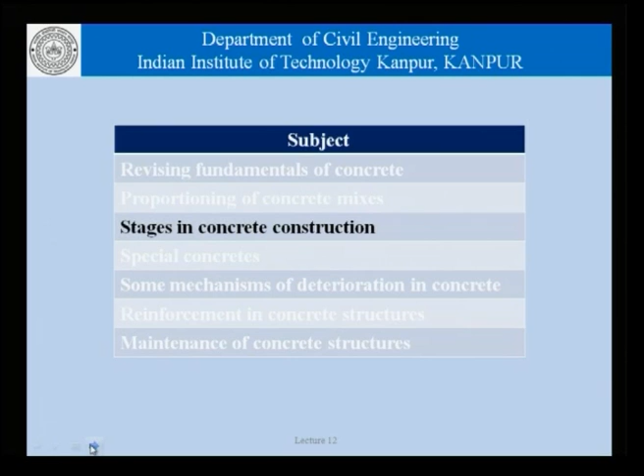So in the discussion today, we will look at the aspect relating to stages in concrete construction from the point of view of quality control and assurance.

We should remember that quality is closely related to accidents and safety. Poor quality construction invites accidents while construction is going on, or even later on. Therefore, it is important that everyone involved with concrete construction leaves no stone unturned in ensuring quality construction.

We will talk today about different aspects which are related to, and very important to, ensuring quality construction of concrete structures.

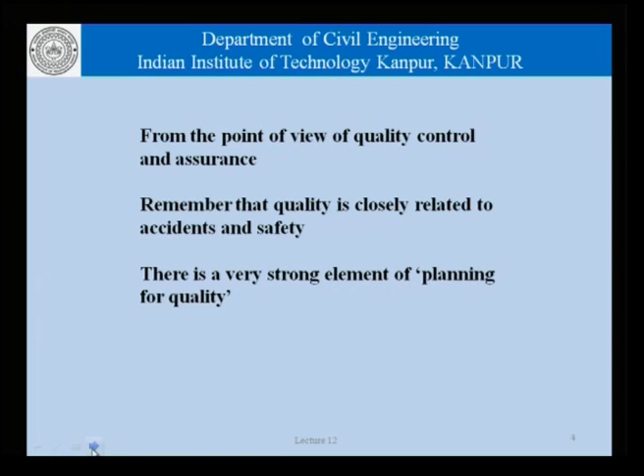There is a very strong element of planning for quality. Quality does not come on its own. Engineers and technical people engaged in various activities related to concrete construction, whether material selection, batching at a concrete plant, placing, or curing, everyone has a role to play in ensuring quality, and it can be planned. If we are systematic in our approach, no matter what we are doing, we would be contributing to quality. Conversely, any lacks, lacuna, or laxity at any stage leads to poor quality construction.

It has an implication on the quality, to the extent that no matter how hard the others try, the quality is impaired. So that is something we would try to take a look at today.

The fact that concrete is mostly placed in situ adds to the problem, making it more complex. Factory made products are easier to handle as far as quality control is concerned.

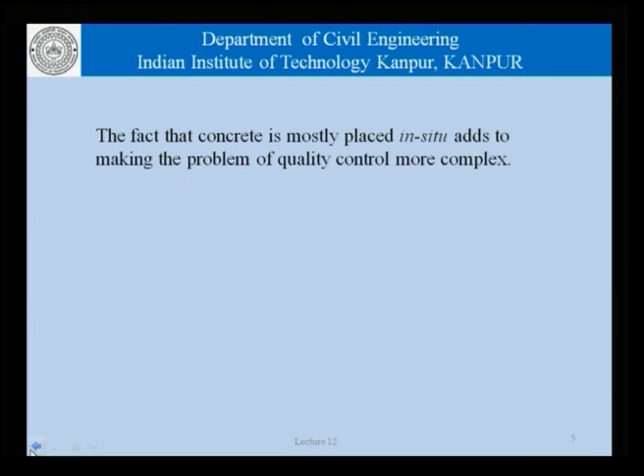There are different players involved in different processes as far as concrete construction is concerned, and the overall quality control cannot be allowed to drop in the no man's land. It is important that not only the people involved in the different individual aspects, material selection, proportioning, batching, transportation and so on, do their job, but finally the overall control of quality is also exercised and not lost sight of.

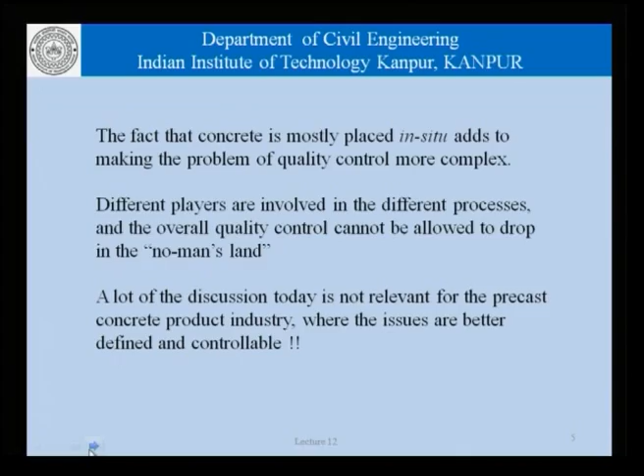A lot of this discussion today is not relevant perhaps for the precast industry, where concrete products are made in a controlled environment, in a factory, so the rules of normal mechanical engineering or a production line quality control are applicable. Today we are concerned primarily with concrete being placed in situ in a construction project at site.

Let us take an illustrative example. Consider the construction of a multi-story building. As is usual practice in such constructions, the shuttering for a higher level slab rests on the previous or lower slab. In a particular case, the slabs collapsed, and the accident was attributed to the fact that the previously cast slab did not have sufficient strength to carry the load that came upon it during construction of the upper slab.

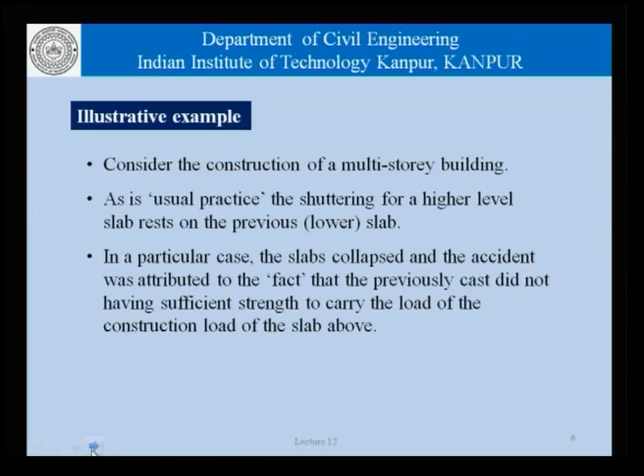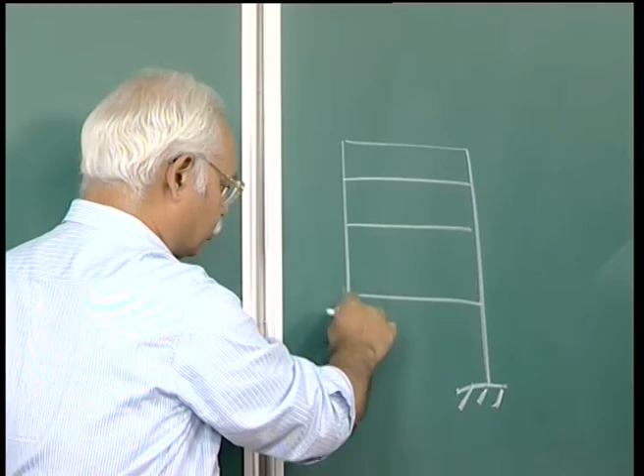What we are saying is the following: if this is a multi-story framed construction, we cast the structure up to this point, and to cast the slab here, we have the shuttering for this slab resting on the lower slab.

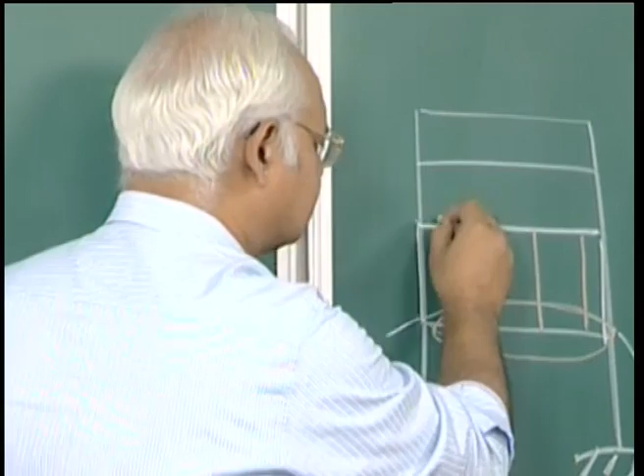While this slab is cast, the entire dead load of the concrete being cast, the live load of people moving around on it, the equipment kept there and so on, is transferred to this slab, which may not be very old. It is not difficult to believe or envisage a situation where, if this slab has not gained sufficient strength, the entire portion here will simply collapse.

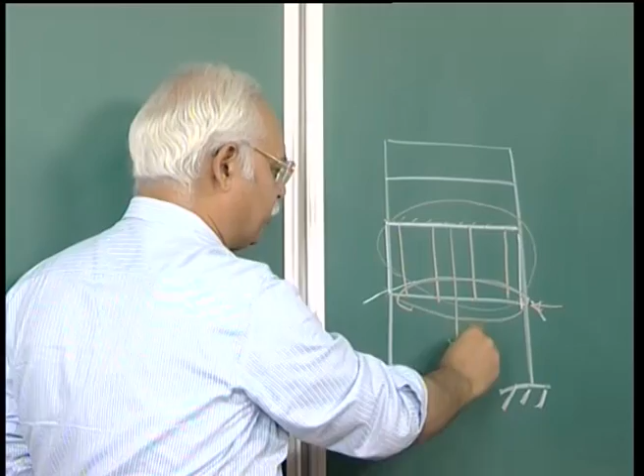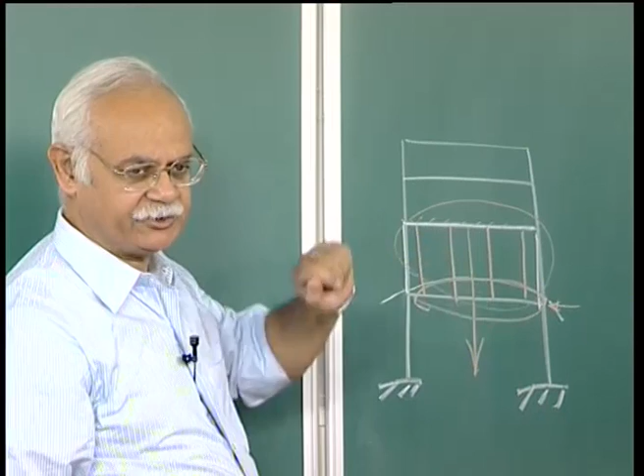If the dead load being applied, or the construction load being applied from the slab here, acts on this slab prematurely, what could be the possible causes for this situation? It could be the use of cements that had a slower initial gain in strength.

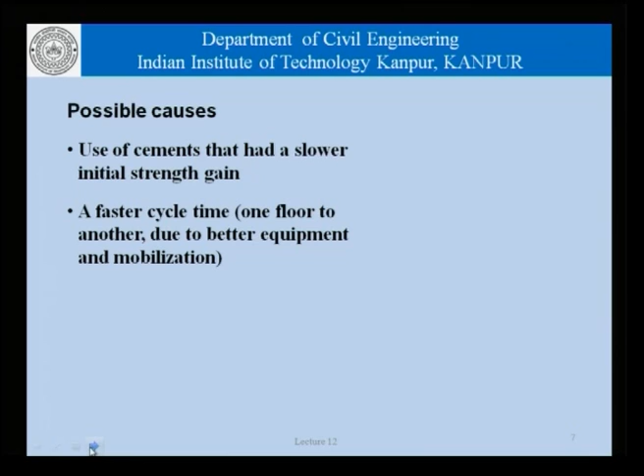It could be a faster cycle time, one floor to another, due to better equipment and mobilization, usually between one floor and the next. That is, the time it takes to do the columns, tie the scaffolding and shuttering for the next floor - that is what is called the cycle time, from one floor's slab to the next floor. Construction engineers try to maintain a certain schedule - say 3 days, 7 days, or 12 days - that is how that cycle will be, and how they plan their construction activity.

Now, on account of mechanization, better mobilization and so on, it is possible to cut the cycle time. But if we are not conscious of the fact that cement takes a certain amount of time to hydrate to the extent that a certain amount of strength develops, we are really playing with fire.

The importance of construction loads could have been ignored in the formal design process. When we design a concrete structure, these slabs for example, we design them for live loads, dead loads, wind loads, earthquake loads and so on. But in case the construction load happens to be substantial, then one has to formally include that in the design process itself.

There could be workmanship issues such as lack of curing leading to inadequate strength development at the bottom floor. Now, there could be so many factors, and some of them can be identified through traditional QC procedures. For others, it may not work.

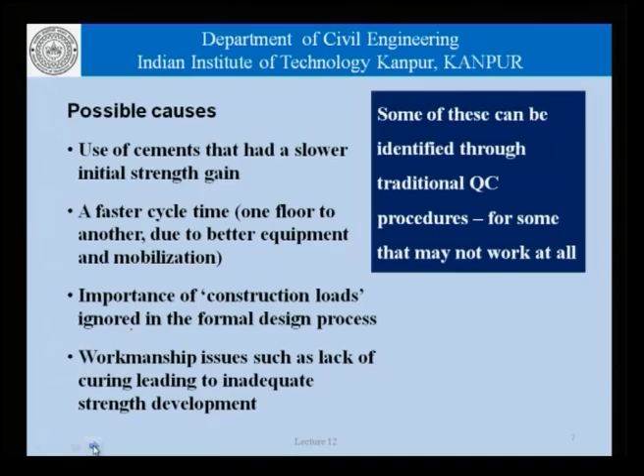Traditional QC procedure, as far as concrete construction is concerned, deals with strength gained in cubes. Now, the strength gained in cubes is determined while the cubes are cured in water at a certain temperature. The slabs need not be cured in those conditions. They may not have been adequately vibrated and so on and so forth.

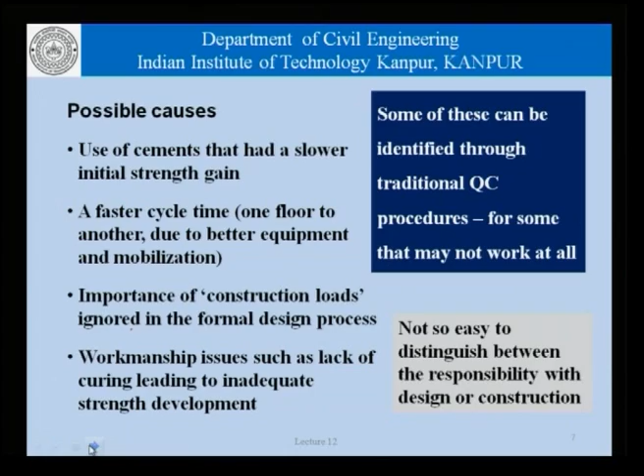The case or illustrative example that we discussed just now briefly also brings out the fact that it is not easy sometimes to distinguish between the responsibility of a designer and a contracting agency involved with the construction work. Indeed, finally, it is the construction work that has collapsed, but what was responsible for it could have been a design flaw, or lack of guidance to the contracting agency to carry out the work in terms of determining the kind of strength required for the slab before the slab above it could be cast, and so on.

Now, what is quality construction? Are there any absolute standards for quality? This subject has been debated greatly in literature dealing with products, industrial engineering, management issues and so on. From our point of view, quality would mean perhaps that the concrete construction should meet the specifications, which in turn means that there should be clear specifications and appropriate test methods for evaluation.

Also, consistency is another very important dimension of quality. Variability is an indicator of poor quality.

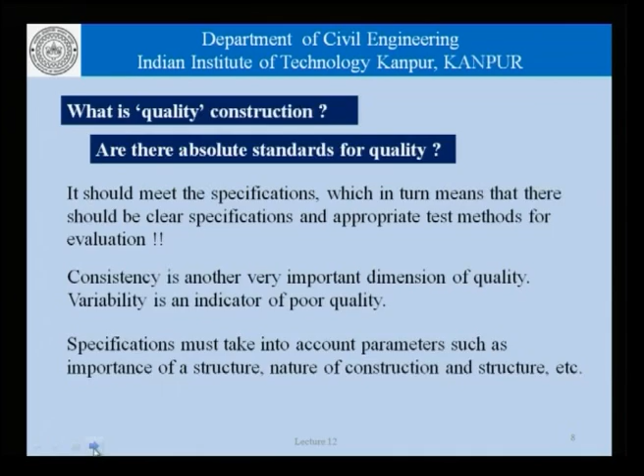Specifications that we write for quality must also take into account parameters such as the importance of a structure, nature of construction and structure, and so on. The specifications that we write need to address challenges on account of use of new materials, mechanization of construction, and changing professional environment.

Basically, quality means compliance with standards. If the standards are such that a medium performance is expected, that is all right, in which case the product should be of medium quality. If high performance is expected, then indeed the product should clear those higher standards. We must set the standards clearly and ensure that the construction meets that benchmark. Therefore, we must write the specifications very, very clearly, very, very unambiguously, so that it is easier to ensure compliance.

From that point of view, these 3 points we will elaborate a little more. We are using lots of new materials in construction - blast furnace slag, silica fume, fly ash, chemical admixtures which could be air entrainers, water reducers, set regulators and so on. We could be using short fibers in fiber reinforced concrete, and different kinds of reinforcing bars, epoxy coated bars, fiber reinforced plastics and so on. We could be using curing or sealing compounds.

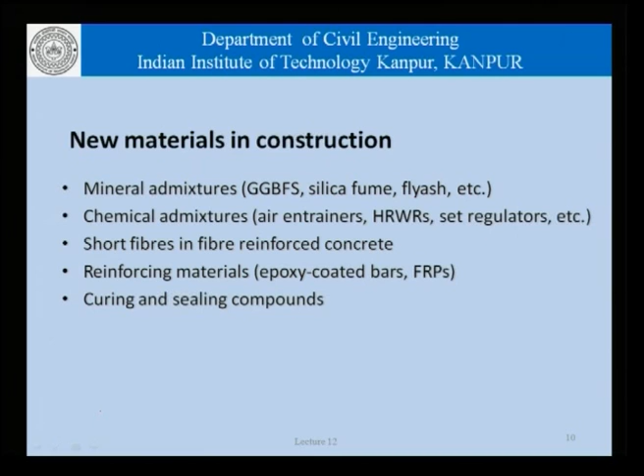So long as we ensure that the quality is not compromised, we can more or less use any material we want. For that, we need standards which will test these materials and test their compatibility with concrete. For example, certain fibers which are not durable in an alkaline environment would not be suitable for concrete construction, because concrete is a very alkaline medium. Therefore, designers and engineers must understand the concrete environment and properties, and then choose materials to enhance the properties of fresh or hardened concrete, durability, and so on.

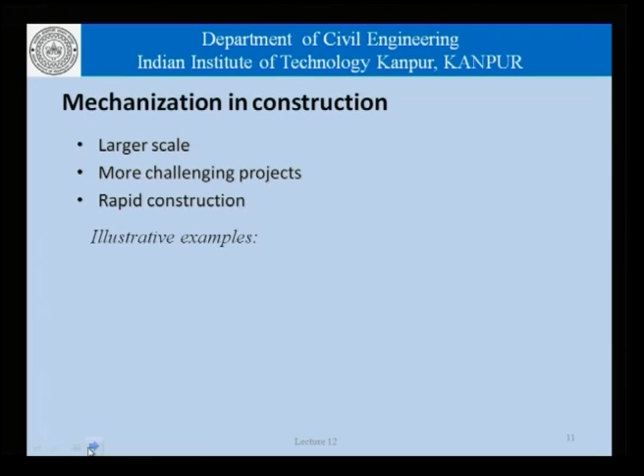As far as mechanization is concerned, that needs to be taken into account when writing specifications, because specifications valid for small scale, non-mechanized construction would not be sufficient when dealing with mechanical equipment. Concrete is being poured into more challenging environments, and very challenging projects are being executed with concrete, and that throws a challenge to clients and end users to write a specification.

One must remember also that in concrete construction, people from different companies work together. These engineers come from different companies with different objective functions. They are not there for charity, they are there for making a certain amount of profit for their company. Therefore, we cannot ensure quality at zero cost.

We can try for quality at low cost without allowing the cost to increase beyond a certain level. But at times an economic decision has to be made, where we say that if quality versus cost has a certain relationship, then for this cost, this is the best quality we can get, and therefore let us live with that. So the decision to accept a certain quality is often governed by economics, and that is something we must keep in mind.

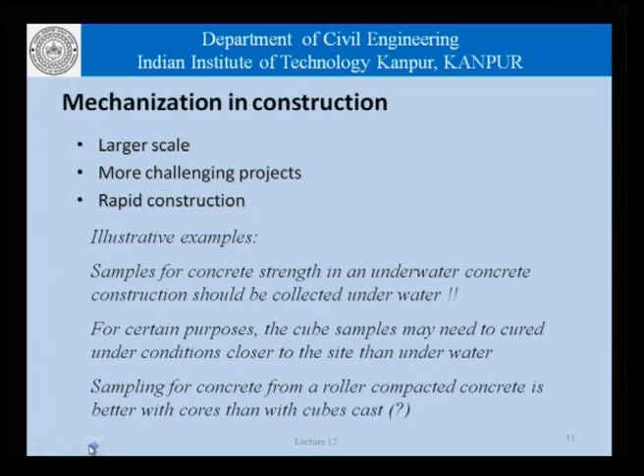Sampling concrete from roller compacted concrete is better with cores than with cubes. Roller compacted concrete is not vibrated using ordinary needle vibrators or internal vibrators. It makes no sense to cast the concrete in cubes using needle vibrators, when the concrete is being vibrated at site using vibratory rollers, except that we cannot create a cube using vibratory rollers. One may argue that we can create cubes using surface vibration. That perhaps is a better way of getting cubes more representative of the concrete cast in the roller compacted pavement or dam than a concrete cast in a cube using needle vibrators.

These things, though they may sound trivial, need to be written down in specifications or methods to be followed for quality control as a site specific document. We must remember that standards and specifications are generally guidelines. They should guide the engineer to write down and enforce specifications at a particular site. To deviate from that is nothing wrong, except that the deviation should be conscious and with full knowledge of the consequences.

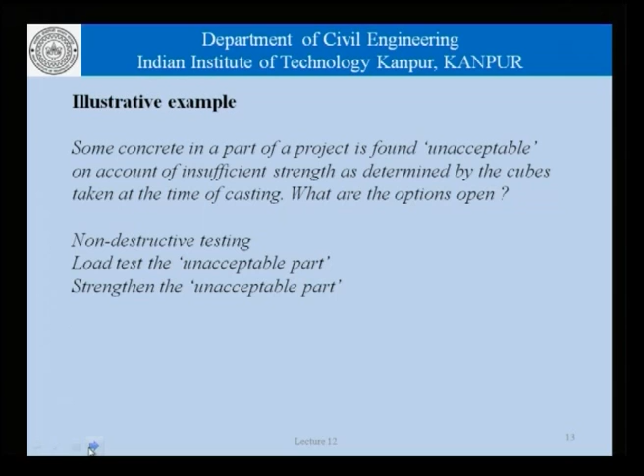So what options are available? As far as the Indian standards are concerned, it gives an option in terms of non-destructive testing, an option of carrying out a load test for the unacceptable part, an option of strengthening the unacceptable part, and of course the option of dismantling and redoing the unacceptable part.

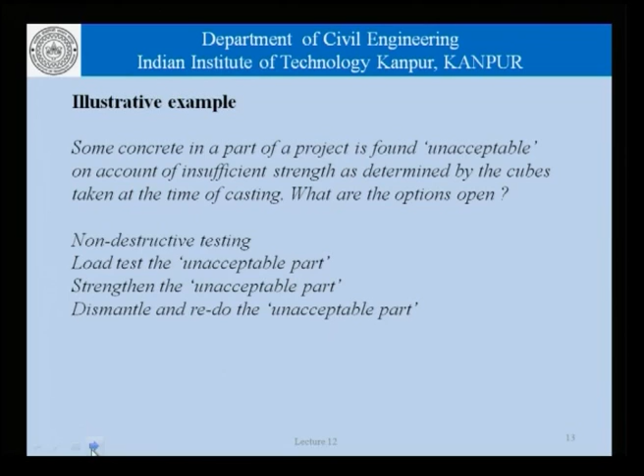The decision making in this kind of case is carried out within the framework of contracting. These things have to be laid out in the specifications, that if certain things happen, then how the situation will be dealt with. Discretion at the end of it has to be given to someone.

There can be a discretionary clause which says there is this issue of extra costs, whether that will be admissible or not, and if so, who will pay for it. There are implications in terms of delay in the project, because the dismantling will take time, and again we have to go back and refurbish the whole thing, creating the new construction. So there is a time delay involved.

The decision thus has technical, legal, and financial implications, besides involving the use of additional resources in terms of time, manpower, material, machines, and so on.

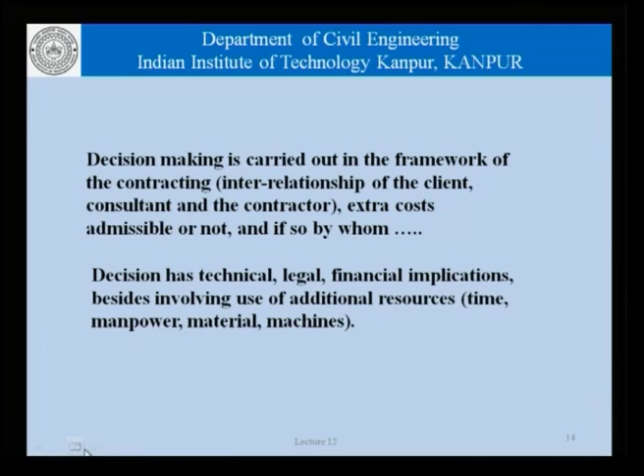Engineers as professionals must be conscious of this very important role, where quality has to be looked upon within this larger framework. Quality should not be compromised, but at the same time the specifications should be clear in terms of what is really required. If that is being met, we need not be worried, but if that is not being met, then we need to take the extreme steps.

One must remember that quality should not only be maintained, but also appear to be maintained. It should not look as if quality has been compromised, even though there may be a technical reason for doing so. There should be provisions which enable the engineer and the builder to actually be able to figure out a situation where there is a problem.

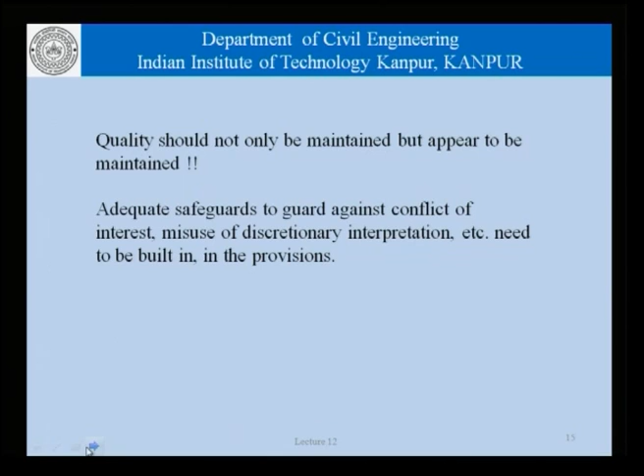Adequate safeguards to guard against conflict of interest, misuse of discretionary interpretation, etc., need to be built into the provisions itself. This is becoming more and more important when we are dealing with international projects, larger projects with engineers from different organizations, different backgrounds, different professional qualifications, trying to work together toward the successful completion of a quality mega project.

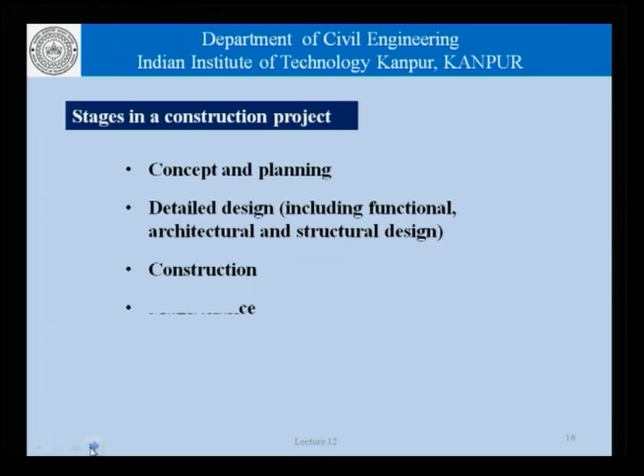Now, let us look at the stages in a construction project. Basically, in a concrete construction project, there is concept and planning, where the project is conceived and a plan is drawn up. This is generally followed by a detailed design, including functional, architectural and structural design, followed by the construction of the project, and finally operation and maintenance.

Now, if we leave out the concept, planning and maintenance, there are quality issues related to design and construction, which we must be aware of, which we need to address when we are taking a view of the overall quality of a construction project.

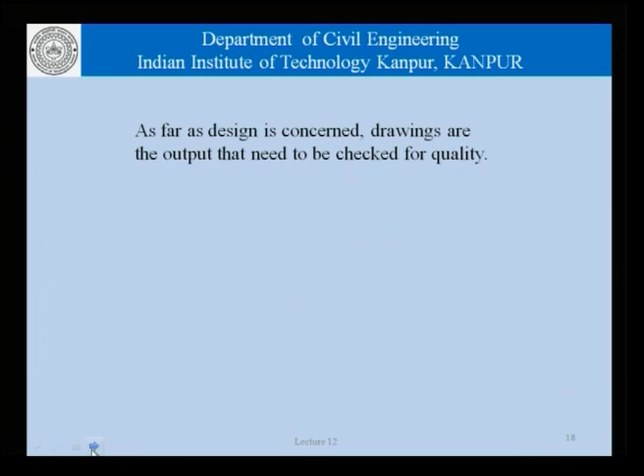As far as design is concerned, drawings are the output that need to be checked for quality. Do drawings have quality? Of course they have quality. The quality of construction drawings can be measured in terms of clarity of detail, the cover, the strength of concrete to be provided in the different members. Sometimes the beams, the slabs, the columns may have different grades of concrete to be provided. That should be specifically noted on the drawing.

The detailing of reinforcement is a very, very important aspect as far as concrete construction is concerned, and that, as far as possible, should not be left to the site engineer, who has so many other things to bother about, and is very likely to leave it to a barbender, who may want to go home at a particular evening and leave out some details or take a shortcut as far as placing certain amount of reinforcement is concerned, and that may have far-reaching implications as far as the overall quality of that particular portion is concerned.

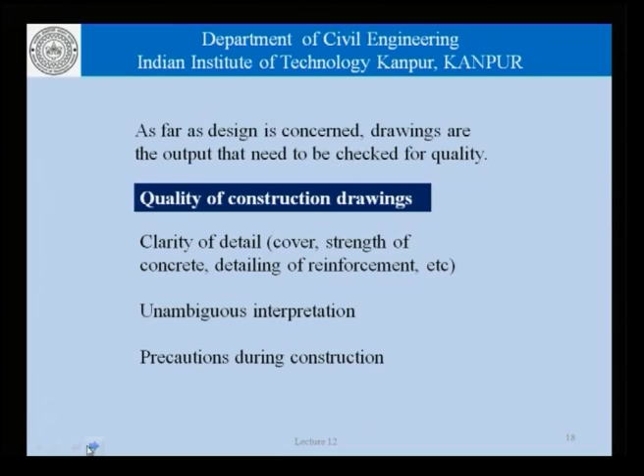There should be unambiguous interpretation. The drawings and the design details should provide for precautions to be taken during construction. If possible, they should actually help the construction engineer with the construction methodology. The construction engineers at site need to interact with designers to develop an appropriate construction methodology, which is in line with the design philosophy or the design process that has been followed.

Coming to the construction phase itself, we have the concrete used and its properties or its quality, which is governed by materials, proportioning, batching, mixing and transportation. We have the formwork, which plays such an important role in determining the quality of the concrete construction. We have issues related to workmanship in terms of placing, vibration, curing and post-processing.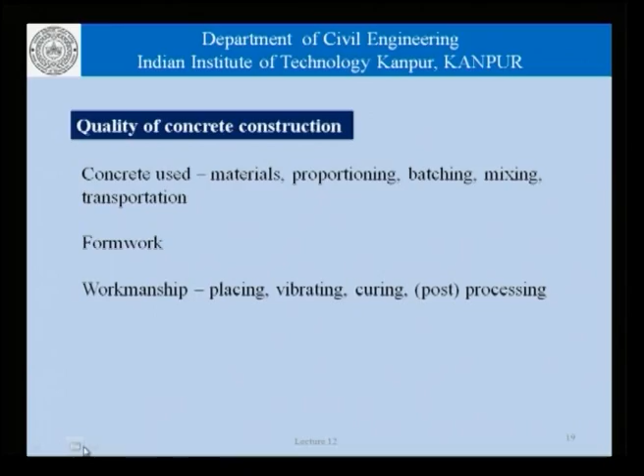Now, what is post-processing of concrete construction other than curing? In certain cases, for example highway construction, there is a process called texturing, which basically means or involves creating some roughness on the surface of concrete that has been cast. Now, when should texturing be done, what is the nature of texturing to be done, and so on, is purely and simply a matter of the workmanship at site.

Whereas some of these things we will talk about in greater detail in a discussion later on, let us focus for the time being on materials, proportioning, batching, mixing and transportation, which in a way comprises the basic construction process.

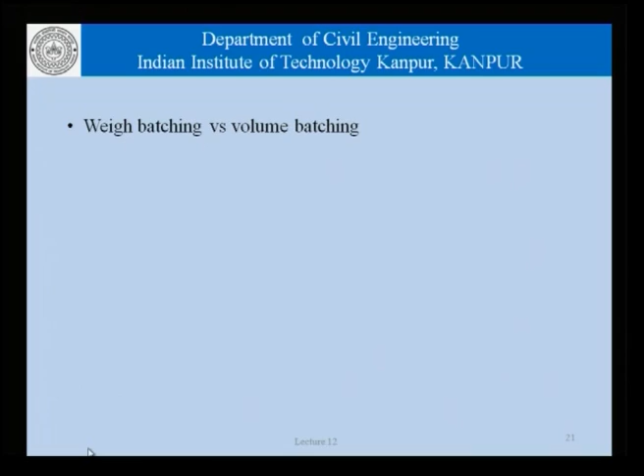There are issues related to weigh batching versus volume batching. Weigh batching means we take the material by weight. The concrete proportion is given in terms of kgs per cubic meter, and we weigh that material and mix it. Volume batching means that we measure the aggregate and sand by volume.

If we are using volume batching and bulk density by definition, the amount of aggregate or sand taken by weight could vary depending on the level of compaction and the actual geometry of the box which we use. It is not a good idea to use volume batching, but in certain cases it is impractical to insist on ready mix concrete which meets a certain standard or has been weigh batched, as the contractor or builder may not have facilities to weigh batch a concrete mix. In those cases, it is not fair to insist on weigh batching, but at the same time one must not hesitate to insist on weigh batching if it needs to be done in a certain project.

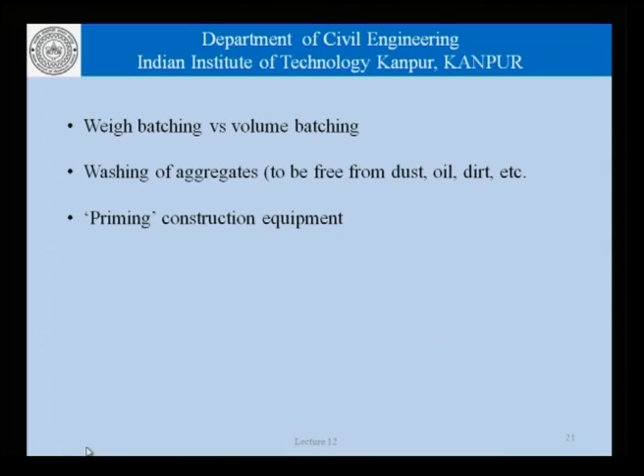Priming of construction equipment. Once any equipment, whether it is the batching plant, the agitator trucks, the slump cone, or whatever is used to take the concrete from the batching plant to the actual site of placement, the pipelines, the pumps and so on, all these equipment, when used for the first time, a certain amount of layer, a certain amount of concrete is deposited on the surface, and the properties of the first batch of concrete are somewhat different from subsequent batches.

Looking at it another way, if the equipment has been used for a certain type of concrete and then another concrete is mixed in the same mixer, some remnants of the previous mix, whether they contain fibers, silica fume or fly ash and so on, will adulterate the first mix or maybe the first few mixes of the new concrete. Therefore, if we want to be very careful about quality, we must prime the construction equipment with the kind of concrete that we are going to use. That is, we will allow a few batches or some amount of concrete to go to waste, just to make sure that a steady state is reached as far as the effect of properties of the mixing equipment on the properties of concrete is concerned, so that part is taken out of our equation when talking of the quality of concrete.

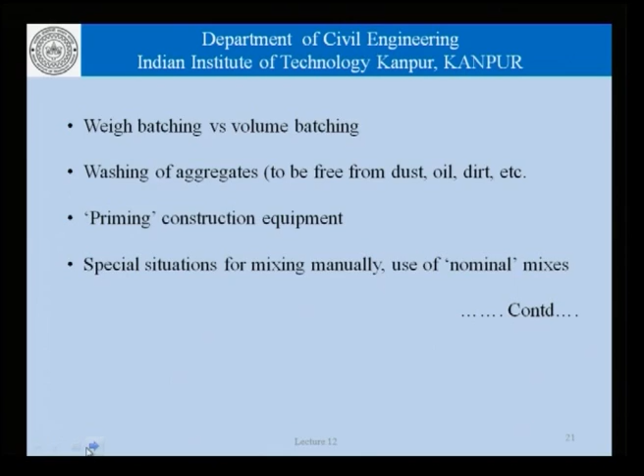Defining an ambient temperature range for normal construction. When concrete is being placed at site, the temperature could vary, for example, in a country like India, from anywhere between -3, -4 degrees centigrade to maybe as high as 45, 47 degrees centigrade. Now, what is the normal range in which construction activity will be allowed?

In other times, we will need to bring in the special considerations which are involved for cold weather or hot weather concrete. What is the normal range where we would allow construction activities without taking those measures?

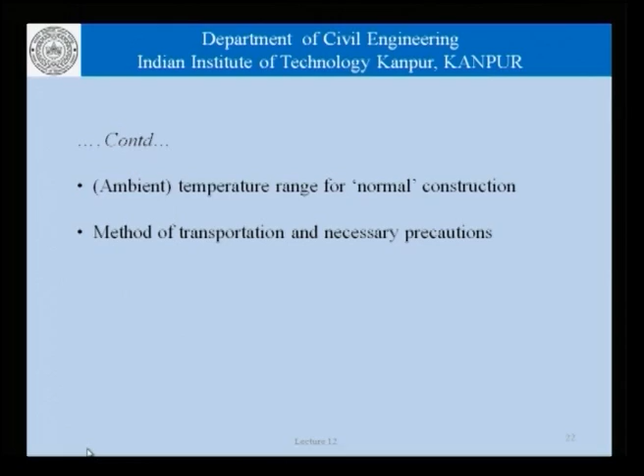When we talk of methods of transportation and the necessary precautions, these have to be spelt out in the specifications, especially if we are using something like a conveyor belt, or agitator trucks or agitator mixers. Is there a need to ensure cooling of the surface of these trucks? When is that cooling required? What is the performance criteria to be used? These are things which we need to clearly write down in our specifications, and only then we can ensure compliance, which will in turn ensure quality.

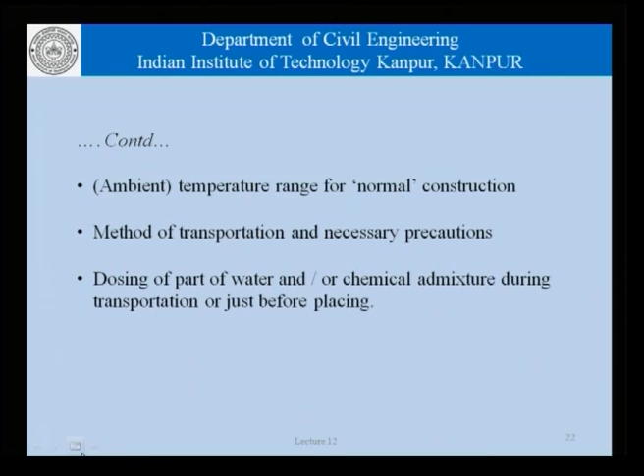There could be issues, for example, for dosing of water or a chemical admixture during transportation or just before placing. This has to be specifically studied on a case to case basis and a decision taken without adversely affecting the total quality of concrete construction.

Now, coming to quantifying quality of concrete construction. At the end of it, the quality needs to be reduced to certain parameters which are measurable, and by measuring them we quantify the quality of concrete construction, and that happens for the properties of fresh concrete, the properties of hardened concrete, and also the properties of the structure which has been cast or made.

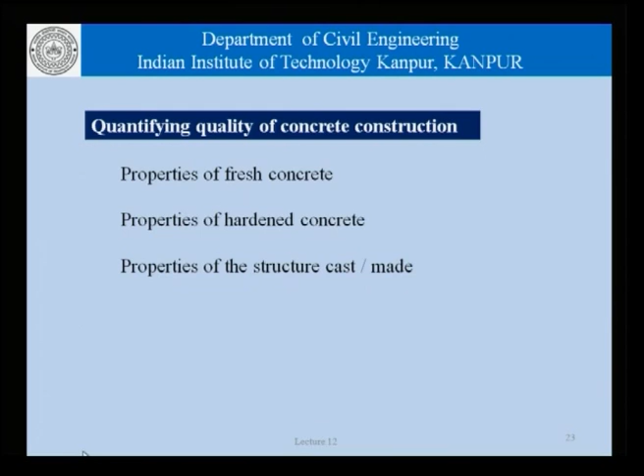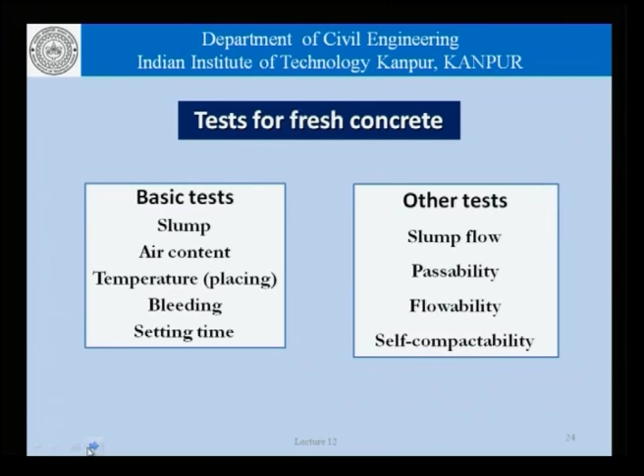Now, as far as the properties of fresh concrete are concerned, we have talked about it earlier. It could be basic tests like slump, air content, temperature at the time of placing, bleeding, setting time, whatever the engineers choose to use. There could be other specific tests or special tests for slump flow, passability, flowability, and so on.

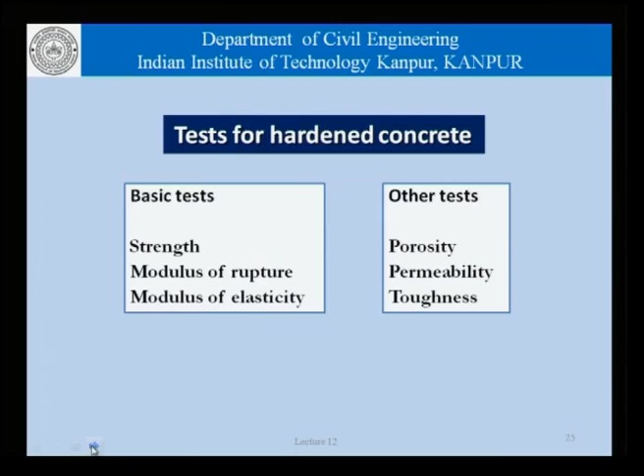Similarly, for the hardened concrete, the basic tests could be strength, modulus of rupture, modulus of elasticity, and so on. Other tests could be porosity, permeability, toughness. These tests help us quantitatively understand the quality of hardened concrete.

As far as the structure is concerned, that is the final product. It is not the concrete, it is not the cement. So, for the test for structure, we need to make sure that there are no cracks, no honeycombing.

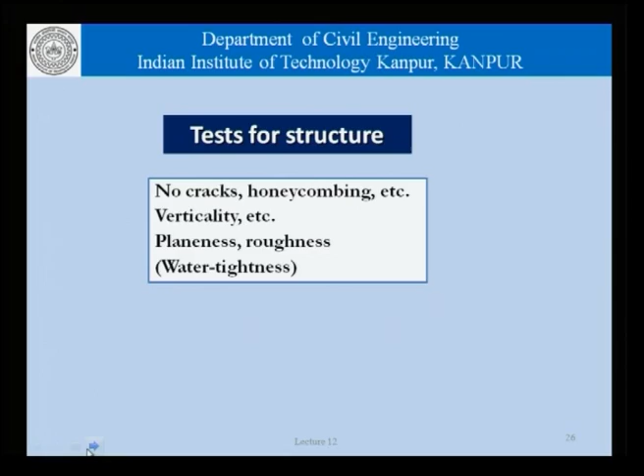There is a verticality in the vertical structure. The structure is not wavering. There is a certain amount of planeness or roughness, and this is governed by the type of formwork used, the quality of formwork used, and the workmanship.

Issues like water tightness. If it is a water retaining structure like a water tank, then there are performance tests which specifically test water tightness. Similarly, for structures which are supposed to be vertical, there could be a vertical wall. It should not be out of plumb by more than a certain amount. That amount needs to be clearly specified, and that is the way we ensure finally the quality of the structure.

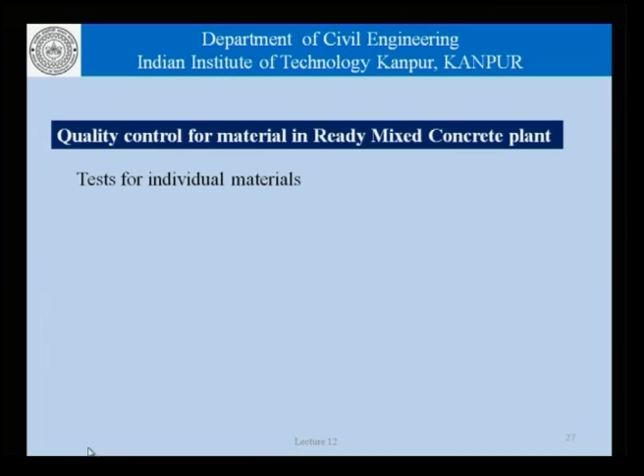As far as a ready mix concrete plant is concerned, there are tests for individual materials. It is important to have specified sampling procedures with the frequency. This frequency of tests can be based on time, that is, the sampling will be done every day, every week, every 3 days, twice a day, and so on.

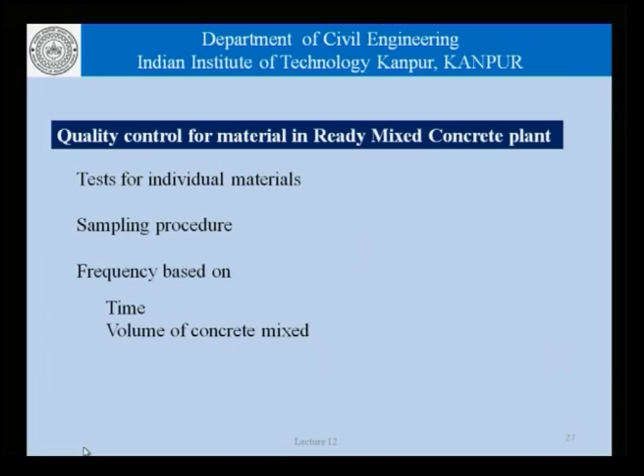It could be specified in terms of the volume of concrete being mixed, because a batching plant need not produce the same amount of concrete every day. There can be a scheme of thought which says that, well, for every cubic meter, every 10 cubic meters, every 50 cubic meters, the material being used will be tested. The rationale could be that after a certain amount of time, the batches of the material being used could change, the time that has elapsed might be different, and so on.

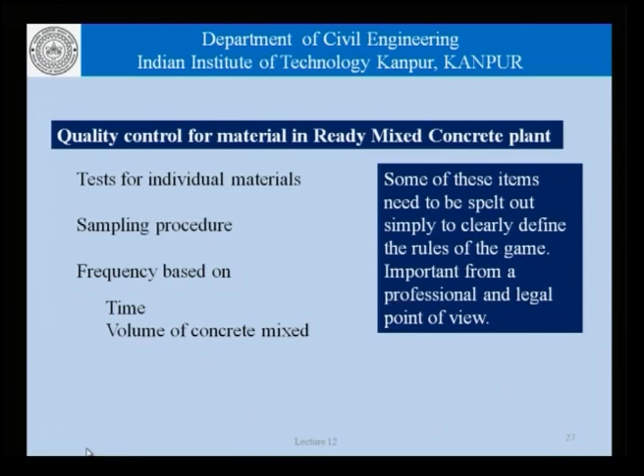We must remember that some of these items need to be spelt out simply to clearly define the rules of the game, and it is important from a professional and a legal point of view. These provisions have legal implications, there are financial implications, and therefore, unless they are written down in that form, it is difficult to ensure compliance.

As far as the testing of concrete itself is concerned, it could be the same tests, slump, air, temperature, setting time, and so on, but the important point is where should these tests be carried out as far as quality control procedures are concerned. They can be carried out at the plant, they can be carried out at the site of placing, or both these places.

Finally, concrete is going to be placed at a certain location, and that is where the concrete must satisfy certain criteria. But it stands to reason to believe that there is no point in taking a concrete which is unacceptable to begin with, all the way to the site of placement, and then reject it. Therefore, there needs to be tests at the plant itself.

These tests at plant and at site should account for differences that might occur during transportation, for example slump loss, air loss, evaporation of water, and so on. These are the kind of considerations which would give rise to a procedure by which some water or a chemical admixture may be added at site and not at the batching plant.

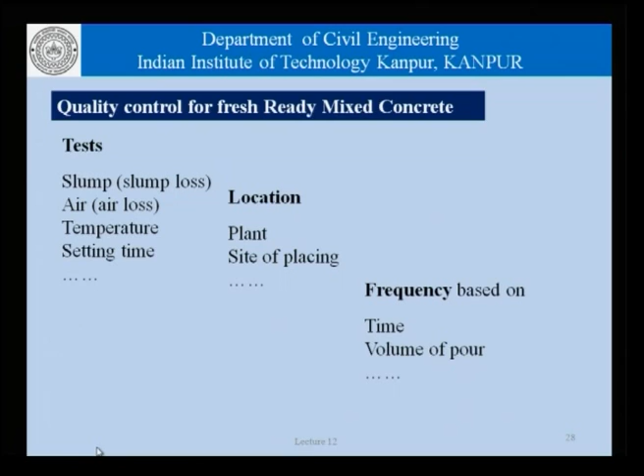There is this issue of frequency of sampling. Again, the frequency could be based on time, twice a day, once in 3 days, or it could be based on the volume of pour.

Since testing involves use of resources, if it is not specified, it may not be carried out, and therefore it must be specified. Here too, the issue of frequency of testing is very important.

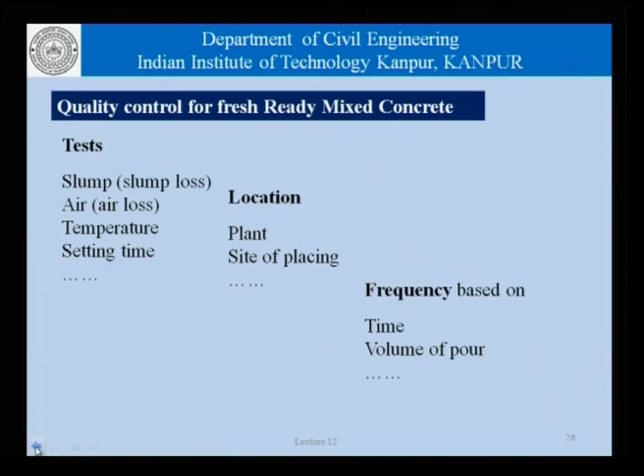How often should the sampling be done for properties of fresh concrete, properties of hardened concrete, whether it is at site or at plant, whether it should be governed by time, that is twice a day, once in 3 days, once a week, whatever, or should it be on the volume of the pour, for every 10 cubic meters, every 50 cubic meters, every day regardless of the volume, and so on.

This needs to be laid down, because testing involves consumption of resources, and somebody may like to cut corners if a minimum sampling frequency or a minimum amount of sampling is not specified.

Now, having discussed the different aspects relating to quality, let us try to conclude the discussion for today with some homework, as we usually do.

We could study the quality control parameters for concrete construction in different specifications. We have been talking about different specifications being written for different kinds of concrete construction in different countries. The specifications could be different for dams, different for bridges, different for pre-stressed concrete, and different from India to the United States or Singapore or Japan. We could study the quality control parameters in these different conditions and countries.

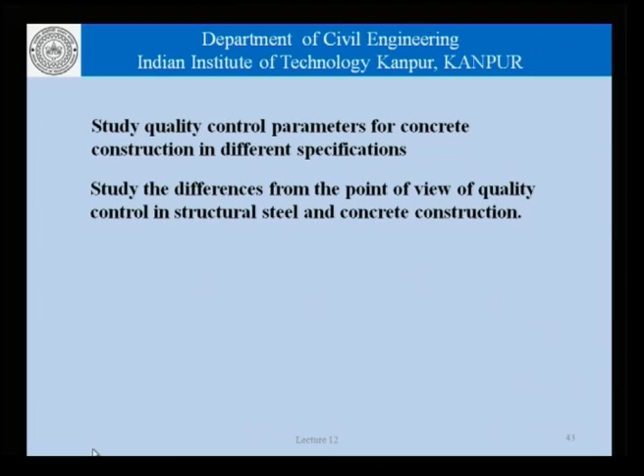It would be interesting also to study the differences from the point of view of quality control in structural steel and concrete construction. Structural steel construction is not something we have talked about in this course, nor do we intend to. But the principle is that steel is a factory made product, rolled sections are made in factories, built up sections are fabricated at site, and the whole range of issues as far as quality control is concerned is quite different.

The fabrication drawings for steel structures are often made at site, not so the detailing of reinforcement. Seldom is detailing of reinforcement formally done and recorded at site. The same is true with the design of formwork, something we will probably talk about briefly in some other context.

Enabling structures, temporary structures, these are all very different as far as steel structures and concrete are concerned. So from the point of view of quality control, it would be an interesting study to understand these things a little bit better.

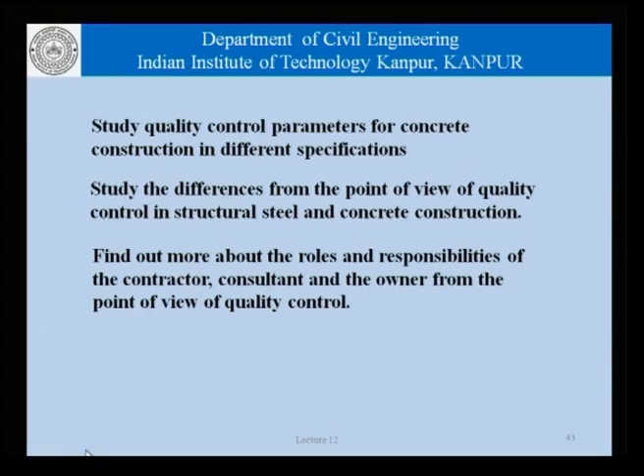We could find out more about the roles and responsibilities of the contractor, the consultant and the owner from the point of view of quality control. At the end of it, the quality of the product, the structure, is of importance, is something sacrosanct to everyone. But how everyone approaches these problems, how the different agencies involved approach their problem, there could be very interesting differences, and that is something we could study a little bit more.